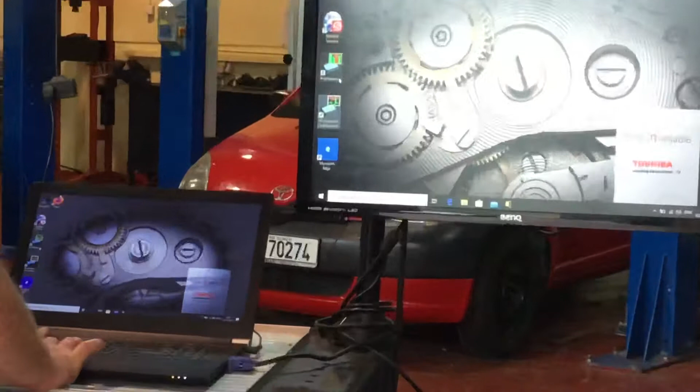Okay, so today we're going to have a look at the voltmeter and then have a look at the difference between a voltmeter and a scope. And the scope we're going to use today is the PicoScope. So, first of all, we're just going to take a quick look here at how to set this up. Now, if you see on the screen here, we have two icons here for PicoScope. The PicoScope 6 is the one we're going to use, not the diagnostic one.

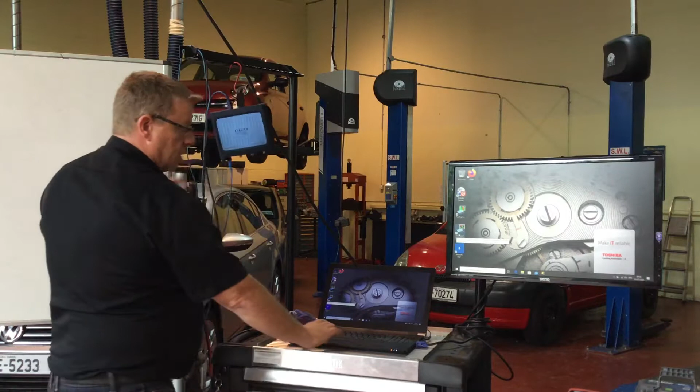So, if I double click on it here, well, before we even do that, let's take a look. This here is our main unit, our box. So the software is downloaded onto the computer and it connects to the box. And what the box is really is a fancy voltmeter, a really refined voltmeter. It's connected by USB here into the computer through the cable here. So when we go to start up, we double click on the PicoScope icon and it will fire up for us.

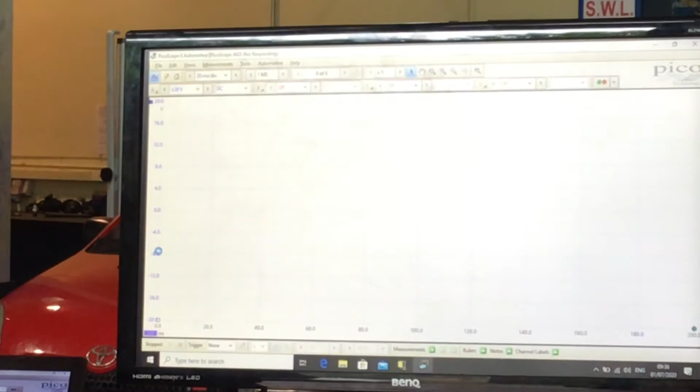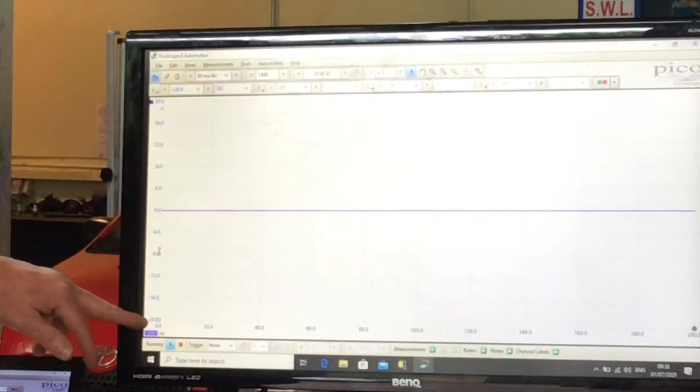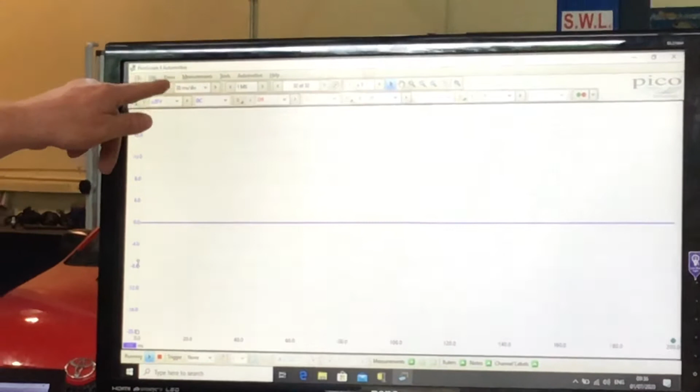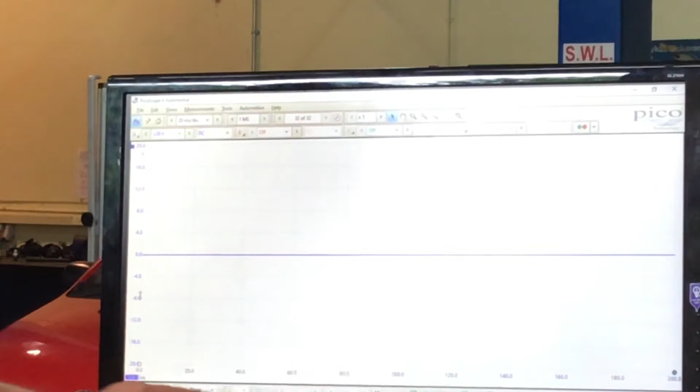So, what we see on the left-hand side here is the voltage scale. It goes from 0 here in the middle up to 20 volts, it's just where it's set at the minute, and 0 down to minus 20 volts down here. And what we see along here is the time base. At the minute it's set to 20 milliseconds per division, which means each one of these squares is 20 milliseconds, giving us a total here of 200 milliseconds.

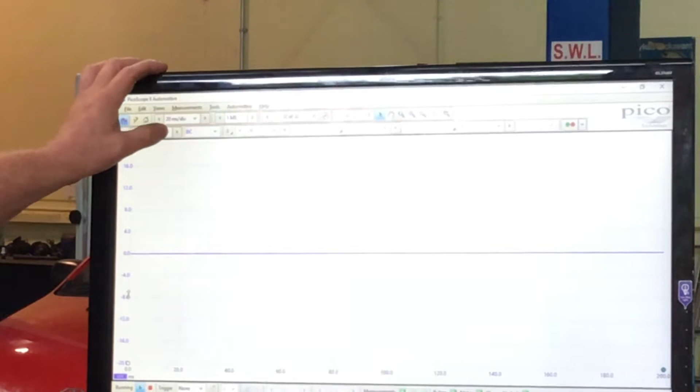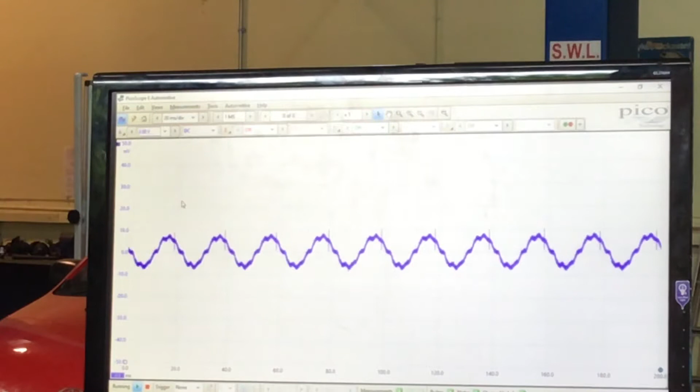Voltage is adjustable here as well. We'll have to use the mouse for this. We can see here we can turn it to auto voltage. Now straight away, you'll notice it's picking up here on the electricity around us, right? It's set that low now that it's going to pick up anything around us, electricity in the air. The scale we've set it to at the minute is plus or minus 50 millivolts. And the larger that I go up in the scale, the less I'm going to see here across the line.

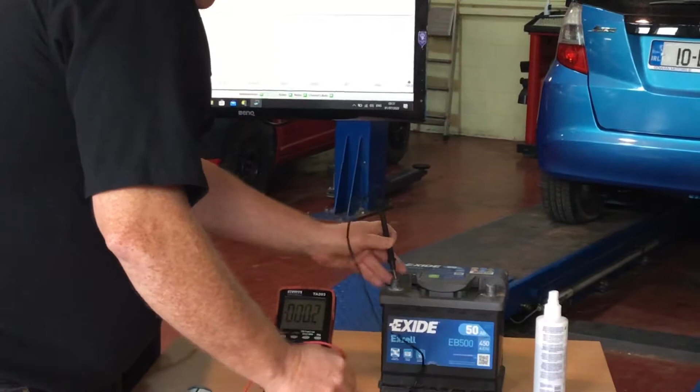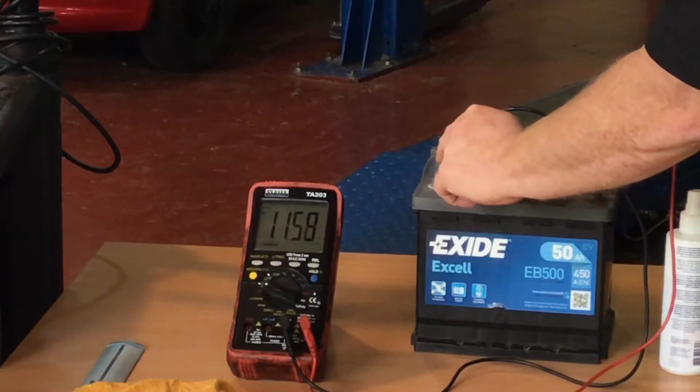So let's just do a quick check here of a battery we have here using our voltmeter. And we connect up, remember, in parallel to check voltage. So correct polarity, black to where the negative is, red to where the positive is. This is just in case you can't see it. And this battery, as it stands, is 11.58 volts. Right? So the voltmeter is fine for measuring voltage on something that's pretty static, that's not changing around.

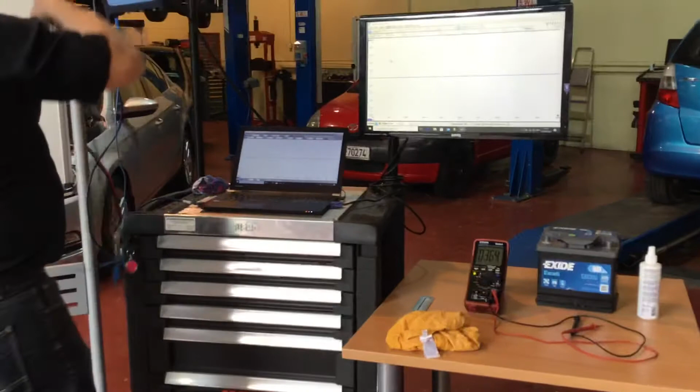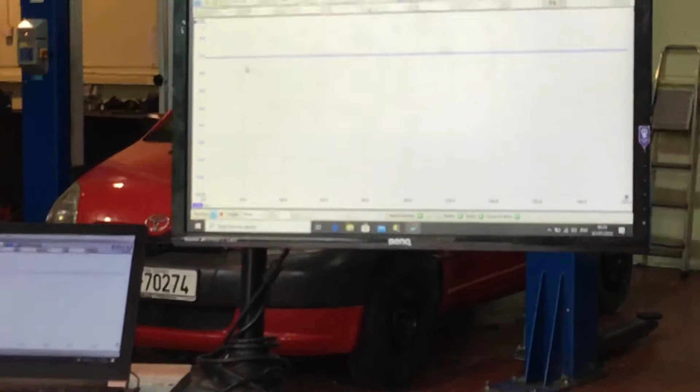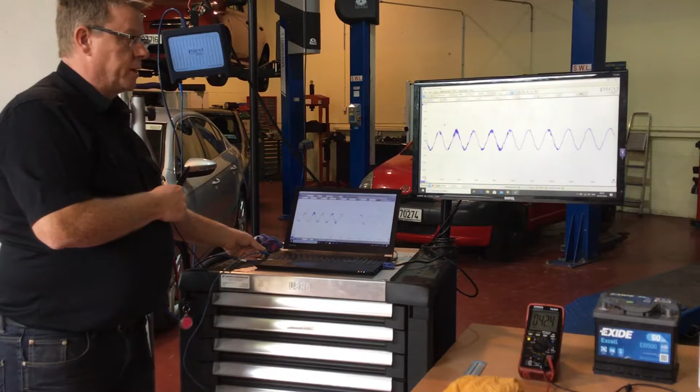We'll do the same on the PicoScope here, so connect our negative on, and we'll see straight away it's gone up to just below 12 volts now. So more or less the same reading as the voltmeter. Now, it is a very sensitive tool, as I'll show you here. With these two leads in my hand, we can see 0 volts there. If I hold this probe close to the computer here, you can see it's picking up without actually probing into it. It's picking up on the AC voltage running through the actual computer here.

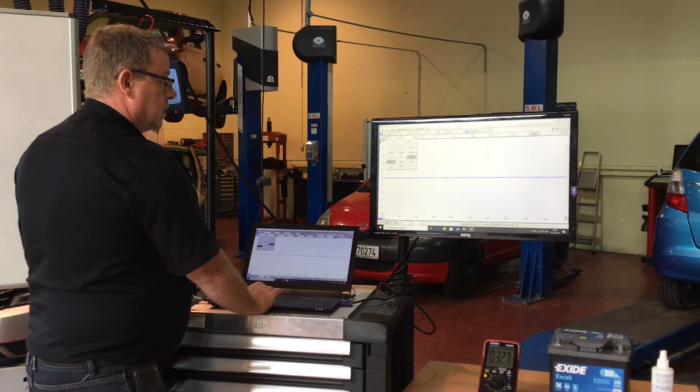I'm going to pick up my pulse. A little bit, 20 volts. We downsize to battery voltage, you see 10 volts. Pick it up a little bit. We go down a little bit further, down to 5 volts. Now it's certainly picking them up. And remember, really what it's used for is picking up pulses of electricity. So, like picking up my pulse here now, just pressed against the jugular.

What we really use it for is fast changing voltage signals, which is when we're doing diagnostics and we're going to check sensors or ignition signals. It's changing that fast and a voltmeter just isn't quick enough to pick it up, so it won't give us any sort of correct reading on it. The oscilloscope is the best way of doing this stuff, and we also get a visual picture of what's going on.

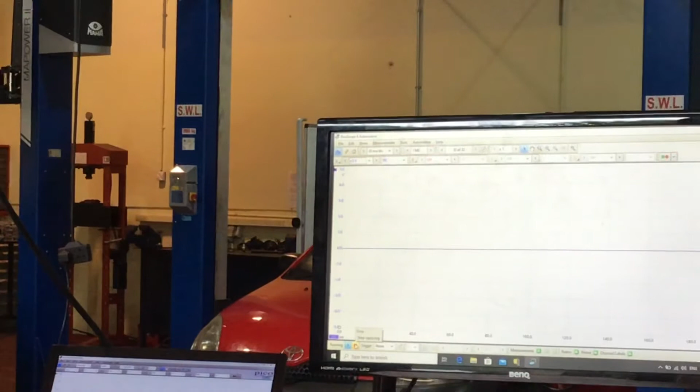So with the scope itself here, down the bottom here, we can run it, we can also stop it, we can flick back through the frames up here. So at the minute it's set up to pick up 32 frames, so it will be 32 of 200 milliseconds, and we can flick back through the frames and find out what we want to see and zoom in on it.

There's also, up in this corner here, we see that we can make the display bigger, smaller, or we can grab a hold of it with this one and zoom right in on a particular section if you really want to get that close to it and have a good look at it. Okay. So, it's quite an easy scope to use.

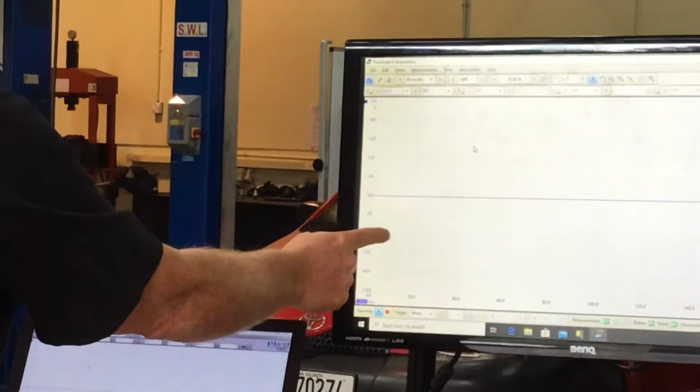Now you can see up on the top here, menus for doing all sorts of stuff up here. But for the minute, we're not going to use those menus, we're just going to use it as a basic scope. So when we use it as a basic scope, we're in full control of what the voltage settings are. Now at the minute it's set to 5 volts, so if we look at the divisions all the way up here, each division is 1 volt, and the same going down, each division is 1 volt.

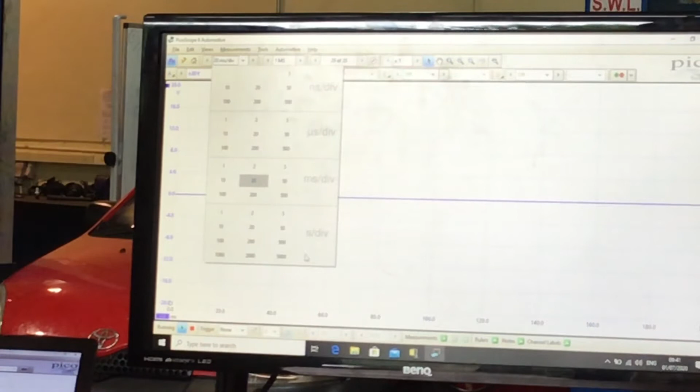But we're in control of what the voltage is set to, so we set it back to 20, and what the time is set to. So if I'm clicking on the time one, you can see the menu comes up, milliseconds, seconds, division. So we need to control the voltage and the time, which means we will have to have an idea of how quickly the signal is changing.

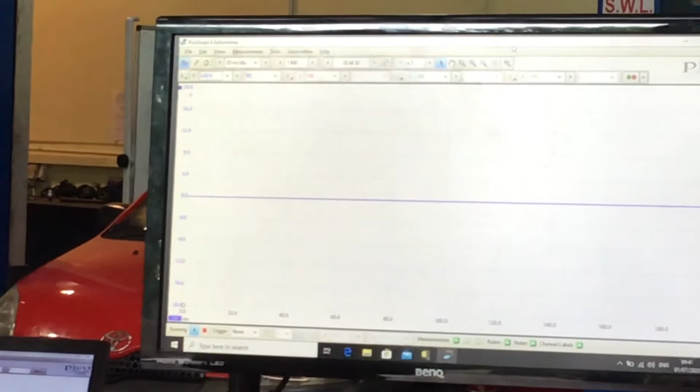Now we can mess around with it a little bit if we don't see what we need to see. It's a bit like a magnifying glass, so if I'm too far away from it, it can't see me. If I'm too close to you, you still can't see it. So we have to control the distance we're looking at the electrical signal from, and we have to have an idea of how much electricity is there in voltage, right? So whether it's up to 20 volts, whether it's millivolts we're looking at, we're in full control of it.

And that way, the theory is needed here now for all these sensors and ignition stuff we're going to look at, just so we can get an idea of where we are voltage and time-wise, so we can set the scope up. Once I set it up, remember, you cannot really do any damage with a scope.

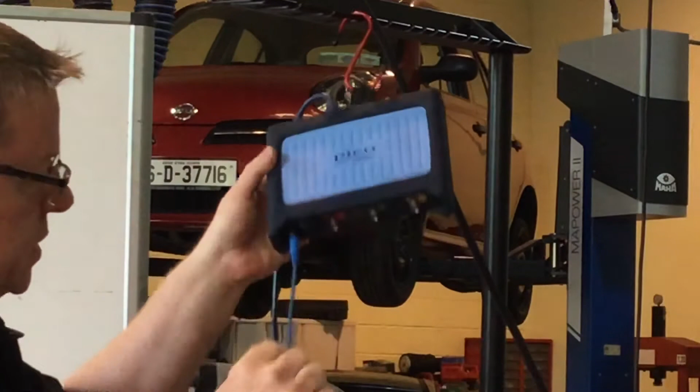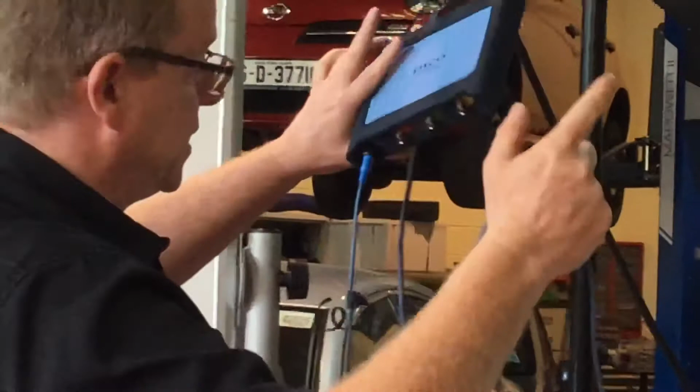We have 2 leads here, and we see on the box here, this is a 4-channel scope. So each channel is coloured, so we have a coloured lead associated to it, so if it's blue here, we use a blue lead, which gives us a blue line. If we go on to the next channel, it's a red, we use a red lead, and we get up a red line and signal from it. Same with the third one, which is green, and the fourth one, which is yellow. So it's quite an easy tool, a logical tool to use.

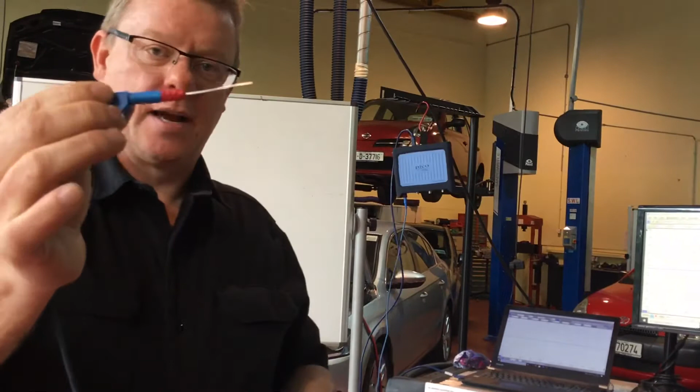2 leads on it here, and for practically all applications that we'll be using it for, 1 lead goes to earth, the other lead is what we're going to probe in. So for the vast majority of stuff on a car, you'll be back probing. So this very thin needle here is going to press down between the moisture stop and the wire and pick up off the wire.

Now for some of the engines we have here, they've built on breakout wires for us, because so many people will be probing them over the years that they don't want the insulation and wiring harness damaged. We can use the breakouts on it just to make it a little bit easier for us. Okay, so again, same thing.

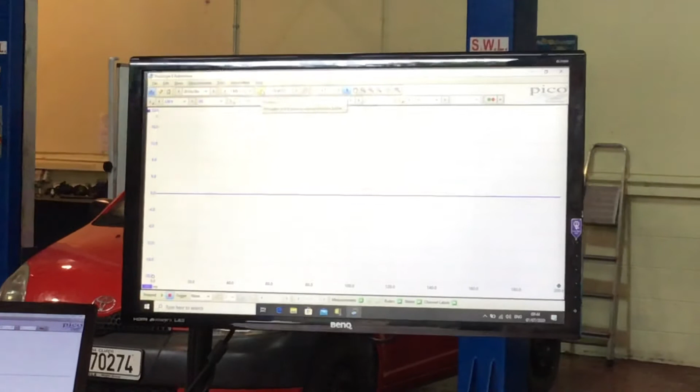As the voltmeter. And we can see, right, if the signal was changing very rapidly here, and we're just tapping this off the battery here, simulating the signal on and off, it's going to pick it up for us. So it's picked it up there. We're going to stop it here. We're going to go back through the frames. Up here on the top, we can click back through till we find one of them.

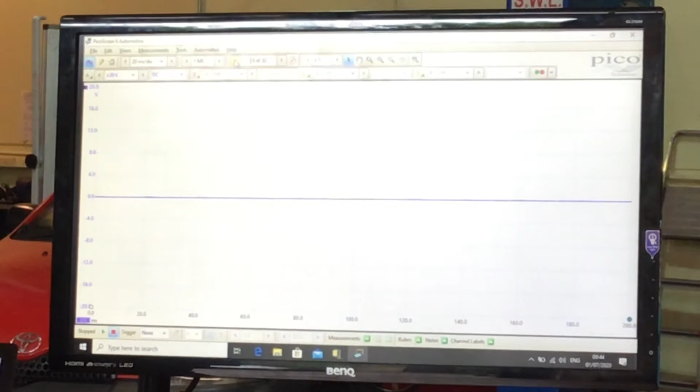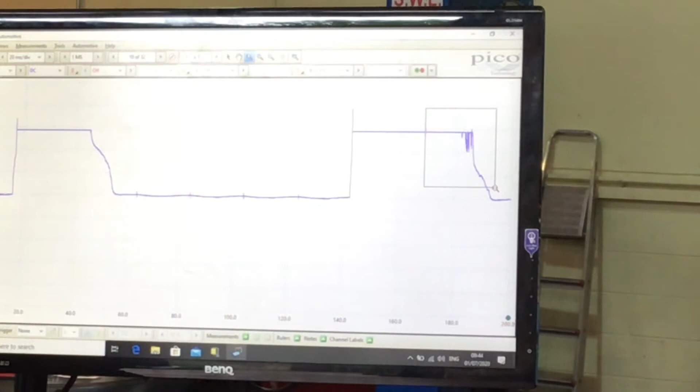Now, again, we can see if we zoom in on this one here, we want to take a look at what's going on here. I can come up here, I grab the magnifier, and I can grab it around here, pull it in, and it will enlarge that section. So we still have the original display down here, but this is what we've zoomed in on here. And we can see it varying from 11.61, and there's little grid lines here that we can use, right?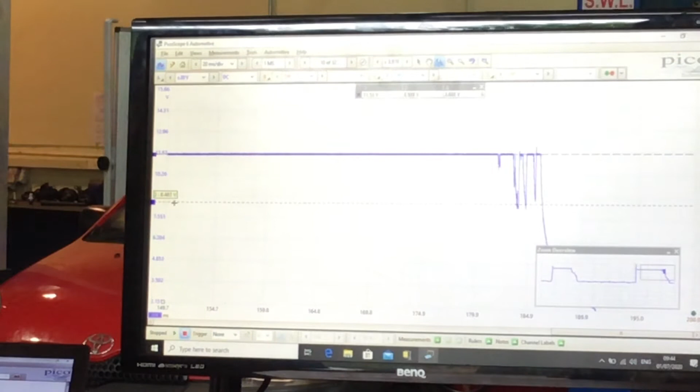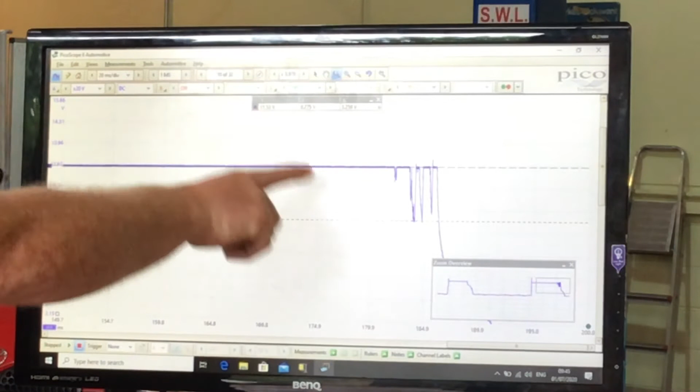So if I wanted to say what was, I'll grab this one, I'll bring it down here, just rest it on top of that line, that's where we started, 11.53. I'll grab the next one here, and we're going to bring it down just to the bottom, to where it bottoms out here before it drops off altogether. And we can see it pops up this box for me here. So it's telling me where I pulled the first line down to is 11.53 volts. Where the voltage dropped down to was at 8.25 volts, and the difference, the delta in between them, is 3.259 volts.

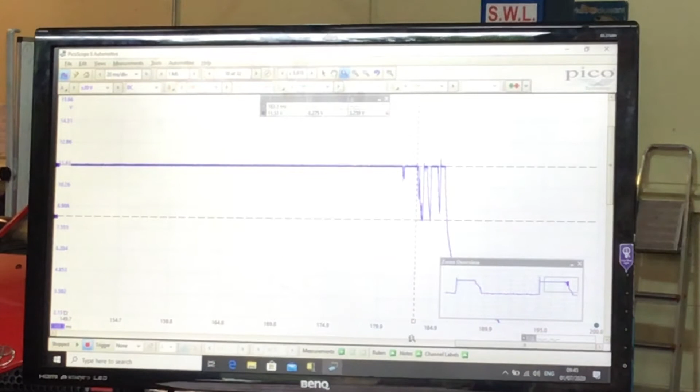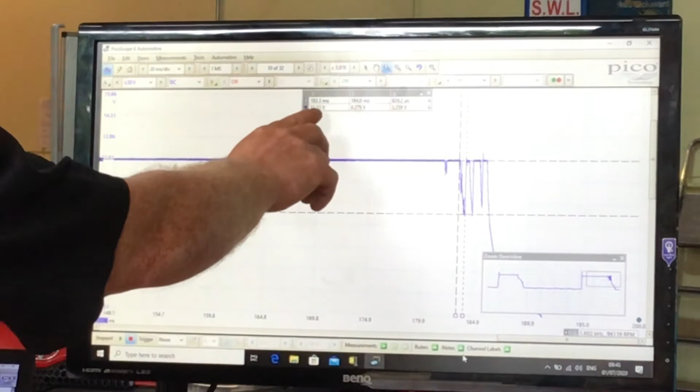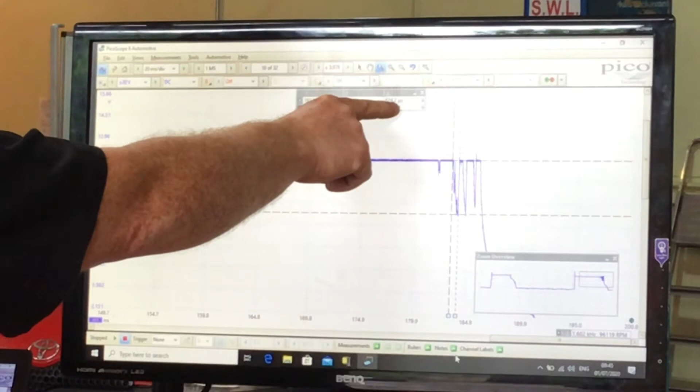We can also use the side ones here to pull them out if I wanted to see how quickly I did that. So let's see, from where I dropped it off there, I can use the next one here and pull it out and just see where it goes back up to the 11.53 volts. So there we are there on this one. The difference between those two lines, where I dropped off originally and where it came back up here, gives me a delta of 824.2 microseconds. So a pretty quick count.

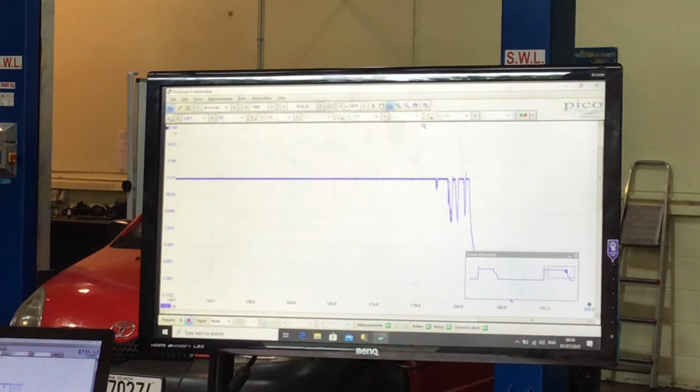So we can use these lines if we wanted to, say, look for dwell time on an ignition system or a pulse width on a signal coming from a sensor, and see how quickly it was being produced, what sort of voltage levels we have on it, difference between voltage on and voltage off. And if we want to get rid of the whole lot then, we just come up to this box at the top up here, and we can close that off, and that'll get rid of all the lines. And again, if we want to see the full complete waveform again, I'll just close off this little box down here, and we're back to our original waveform.

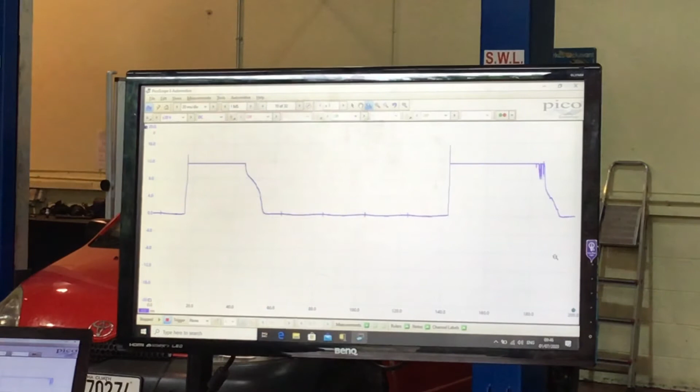So, very easy tool to use, and it's a must really in all garages now, because if you get a fault code and it's sending you towards a crankshaft sensor or a camshaft sensor, whatever it is, remember the diagnostic tool is only pointing you in a direction, telling you there's something wrong here. It's not telling you the camshaft sensor or the crankshaft sensor is faulty, it's just telling you there's something wrong here. What we use the oscilloscope for is zoning in and testing that sensor.

So if it's an inductive type sensor, which we spoke about during the week and last week, it's normally a 2-wire sensor. Now there are some newer Hall type sensors which are 2-wire as well, but for our purposes at the minute, a 2-wire sensor will nearly always be an inductive type sensor. And remember, an inductive type sensor creates its own voltage, back to Faraday's principle of a magnetic field, coil of wire around it, and something passing it by, disrupting the magnetic field and giving us a sine wave.

If it is a Hall sensor, like we had a look at on the distributors, remember it's a 3-wire sensor. First wire will probably be a positive. The third wire will probably be a negative. So we confirm we have a positive and we confirm we have a negative. The middle wire then is going to be our signal wire from the sensor out. So we could use a voltmeter to confirm positive and negative, but because the signal is going to change that quickly, we'd have to use an oscilloscope to see if it's actually changing.